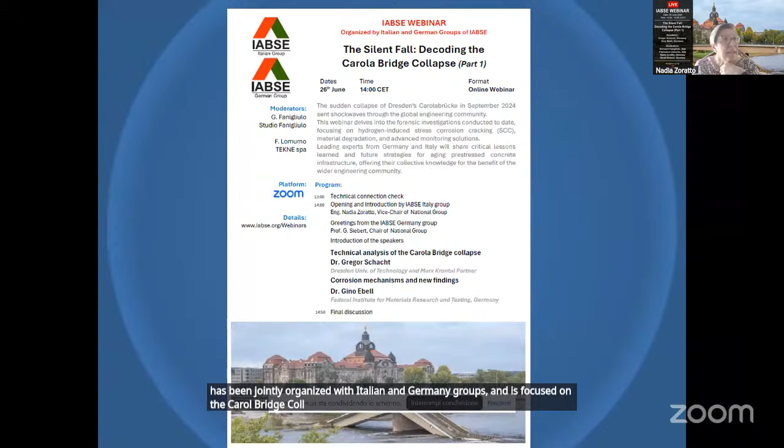Two words to remind you who IABSE is and what it does. IABSE is an engineering association with the mission to exchange knowledge and advance the practice of structural engineering worldwide, looking at all aspects of structural engineering and all types of structures, not only bridges, and also all aspects related to the construction process. I remind you that you can become a member of this great organization as an individual, or alternatively as a collective member. We have members in more than 100 countries.

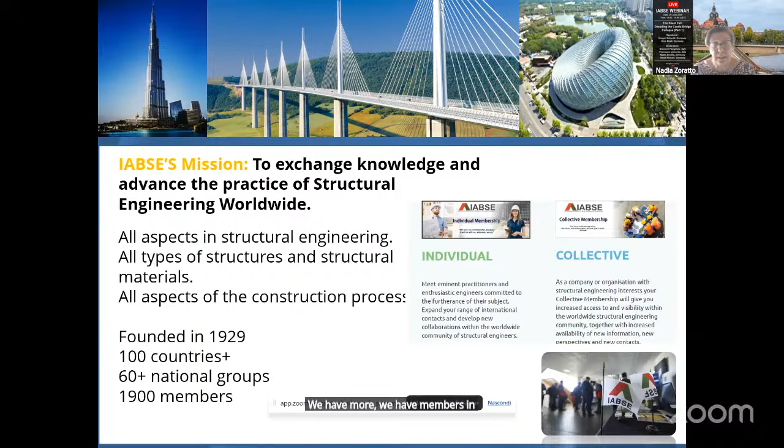For this reason, we have many national groups that are very active in organizing events such as webinars and conferences. In Italy, we have a national group that was refounded recently in 2022, and we are trying to promote several activities with technical task groups and with dissemination and training activities such as webinars and short courses.

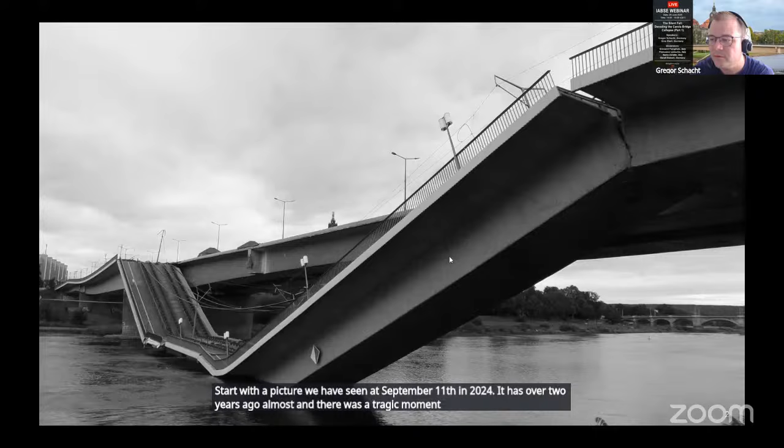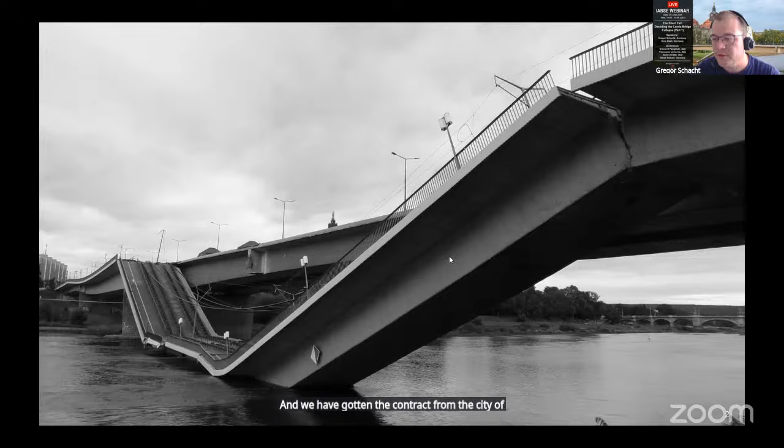Hello everyone. I'm looking forward to presenting to you the findings of the investigations we have done into the collapse of the Carolabrücke in Dresden. I want to start with the picture we have seen on September 11th, 2024 - almost two years ago now. There was a tragic moment when we saw this collapsed bridge laying in the river Elbe. We got the contract from the city of Dresden to investigate the reasons for the collapse, so we were at the site very early in the morning and started the investigations immediately when we could get on the bridge.

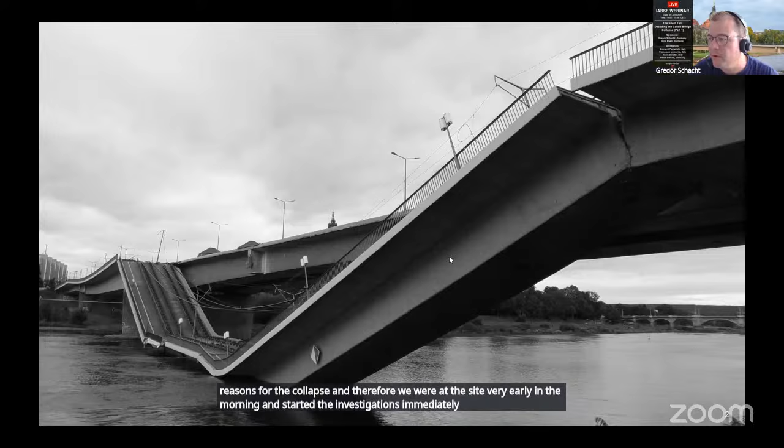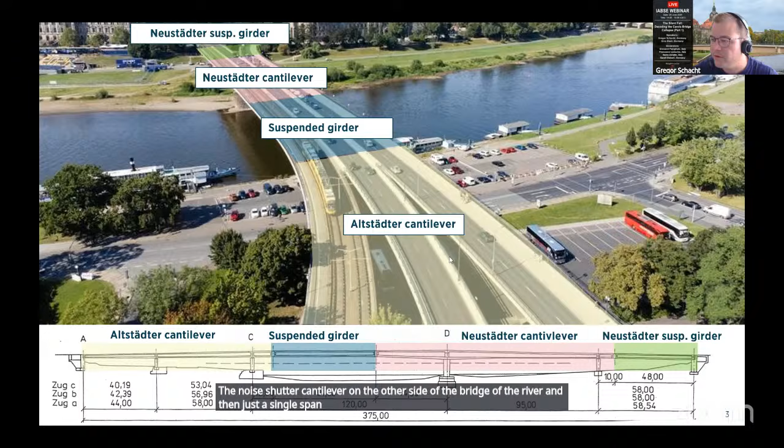First, I want to explain the bridge to you. There are four parts of the bridge: the Altstädter cantilever and the suspended girder in the middle, the Neustädter cantilever on the other side of the river, and then just a single span suspended girder on the Neustädter side of the river. We have a typical cross-section for a prestressed concrete bridge.

What we see in the cross-section at axis D is a lot of prestressing tendons - 194 prestressing tendons. Therefore the compression zone was very compact and strongly reinforced, with a lot of reinforcement there and a thick slab at the bottom.

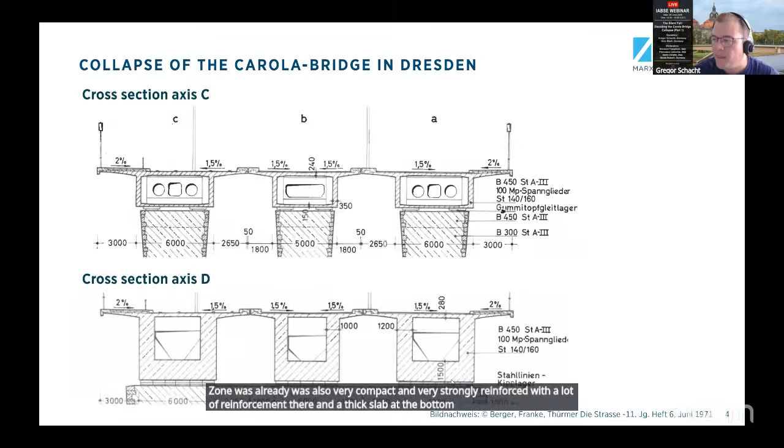The bridge was constructed in different phases. They started constructing the first part on the left side with the cantilever into the river, and on the other side, the second part with the bigger cantilever of 44 meters into the River Elbe, to allow ships to cross during construction. Afterwards, they placed the suspended girder in the middle of the river, and then finished the bridge. Therefore they had to prestress a lot of tendons afterwards, after the self-weight of the girder was active.

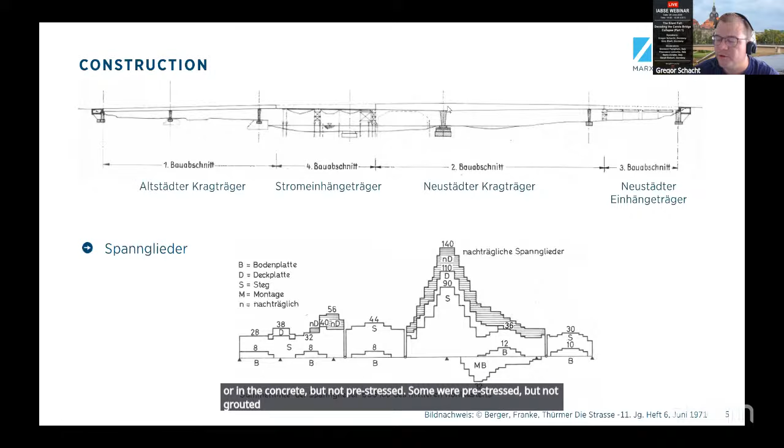These tendons - and that is probably one of the main reasons - many of them were already placed in the tubes or in the concrete, but not prestressed. Some were prestressed but not grouted. So there were a lot of prestressing tendons laying there for a long time during this construction.

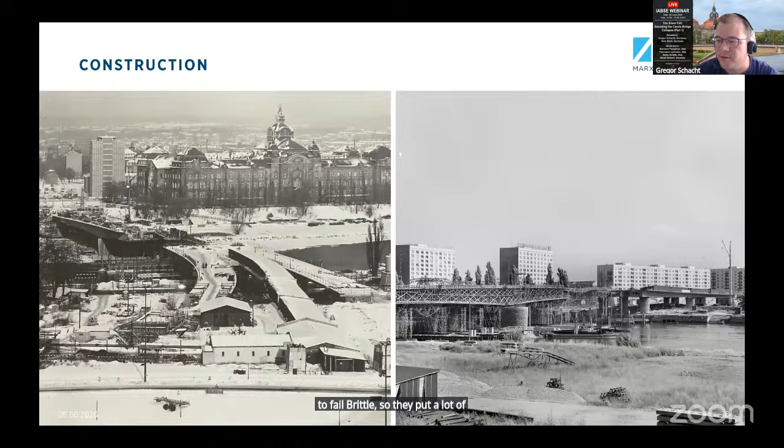They took a lot of care in the construction itself. They placed heated barracks to prepare the tendons before placing them into the cross section, and they were aware of the danger of these prestressing tendons failing brittle, so they put a lot of effort into preventing this from happening. There was one specific construction detail I want to focus on: this cross girder between the superstructures.

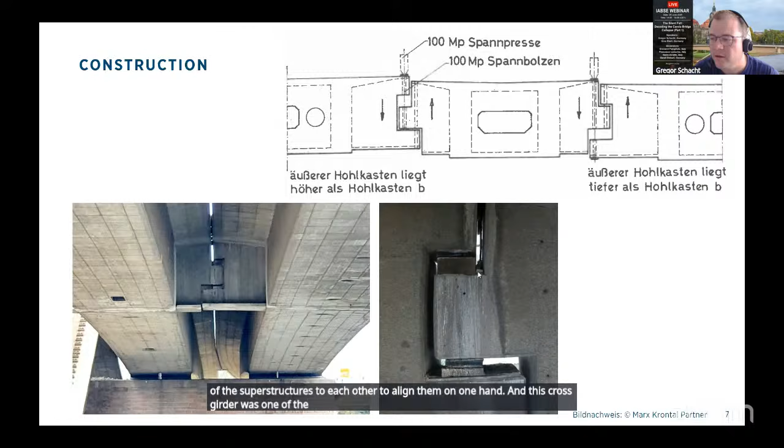They connected the superstructures at the tip of the cantilever, done because they wanted to ensure that all three superstructures had the same height. So they forced them together and arranged the position of the superstructures relative to each other to align them at one height. This cross girder was one of the main reasons why the collapse took place 8 minutes after the last tram crossed the bridge, and not at the moment when the load was actually on the structure.

To have a side view of the collapsed bridge: we have the axis D on the left side, where the breakage started. We have the 44-meter cantilever on one side, the suspended girder, and the other hinge remained on the cantilever of the Altstädter side. At the beginning it was not clear where the breakage started. Here you see the opened cross section, and here is the cross girder I was talking about, placed at the tip of the cantilever - the three superstructures were connected at that point to each other, so they carried and shared the load with each other.

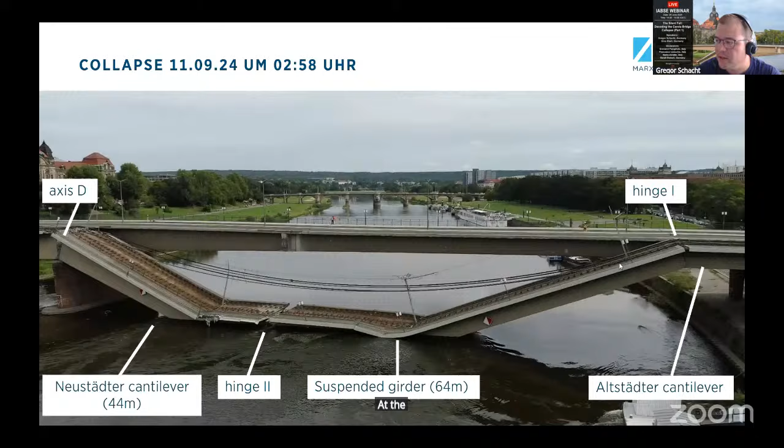At the beginning, as I said, it was unclear where the breakage or collapse started, so we were happy to have a video from ships placed on the River Elbe. They were actually trying to film vandalism, but for us it was a happy coincidence that they filmed the collapse itself.

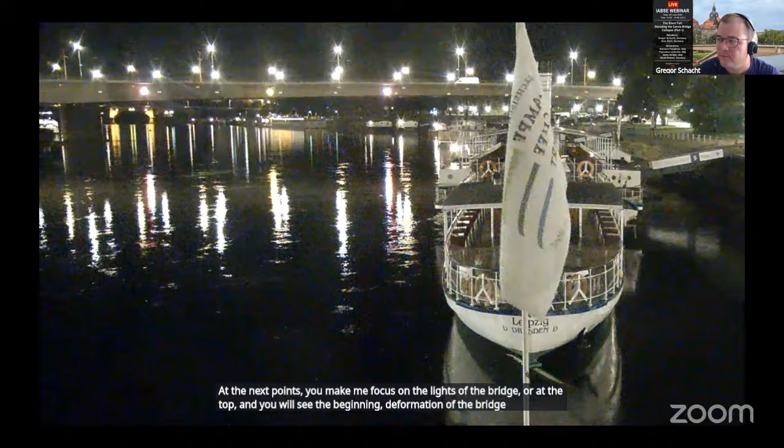If we focus on this white car you see on the bridge on the right side - I hope you can see my mouse - I will click through the single pictures. The car is moving at around 50 kilometers per hour. At the next points, focus on the lights of the bridge at the top, and you will see the beginning deformation of the bridge. Now you can already see the deformation starting. I hope the internet connection is good enough.

As the car goes further, you now see already the bridge is moving downwards, and then it goes really quick.

We were able to see the opening of the cross section at axis D in this video, and therewith we could explain how the collapse started and where the failure started to progress.

Yes, now the self-weight is active and it's only falling into the river. There's now lightning coming up from the electrical power of the tram, and then it was over. Oh, I'm sorry.

Yes, that's the last picture from the ship of the collapse. And in the morning, at the side, it looked like that.

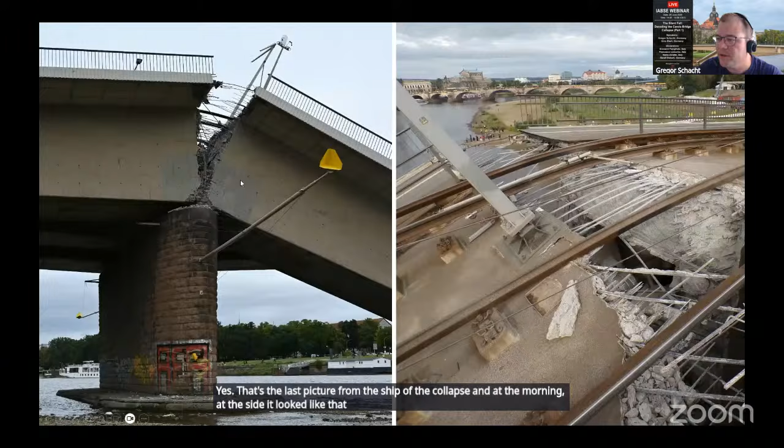We see the cross section at axis D on this side cut, or it looks like it was cut with a knife and opened up. Yeah, only at one cross section.

At the beginning, it was not clear what kind of damage we have here. We see all the tendons placed on this side and the slab at the top here and on the other side. What we can see already is that the broken wires of the broken strands are broken at different points. They look like spaghettis. When we break a spaghetti bundle, it looks like these tendons look like.

Many of the breaking points were inside the tendons in the cross section and some were outside. So that was what we saw on the first day.

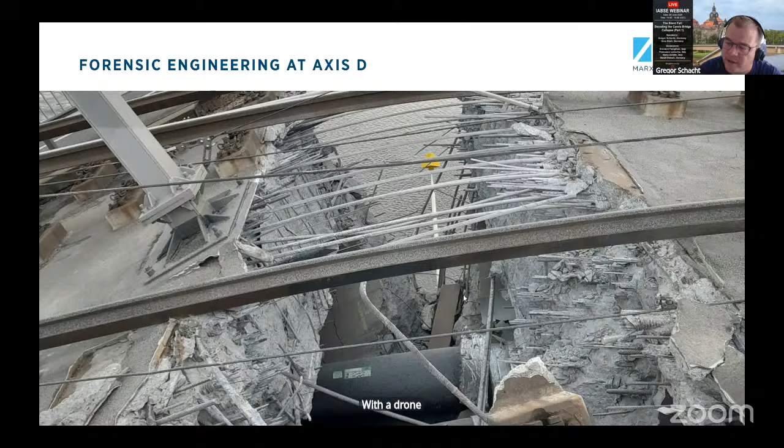And as closer we could get, we started to documentate all tendons with a drone to film all the tendons and to make pictures of them. And then we were getting closer and closer.

What we found was also, maybe one example is this tendon or this wire here, broken at two sides, which is untypical for a prestressed tendon to fail on two sides, on two breaking points.

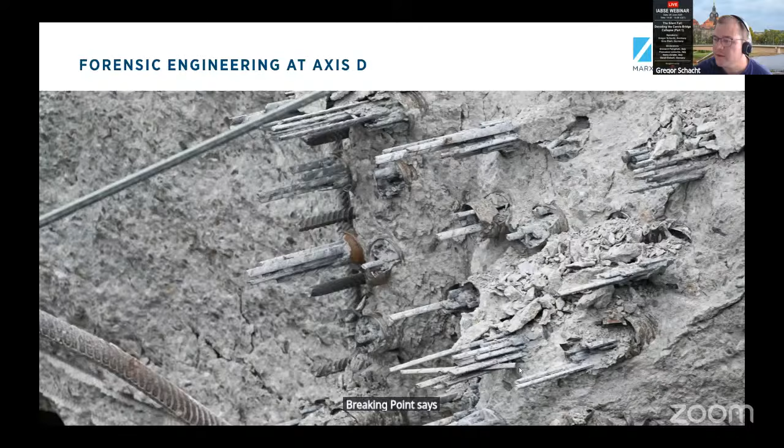Yes, and as closer as we came to the tendons itself, we saw different corrosion states of the tendons. We already had brown tendons or breakage points, cross sections, which were brown and totally corroded.

Gino will explain it later on. We've also found wires that failed ductile, which had typical uncracked, starting cracked, or cracked stress corrosion cracking - these little lenses which form into the steel, which is typical, we can also see it on these tendons up here or these wires up here.

And we had, as I said, different states of corrosion with a lot of brittle failed or brittle broken wires in these tendons. That was pretty clear at the beginning.

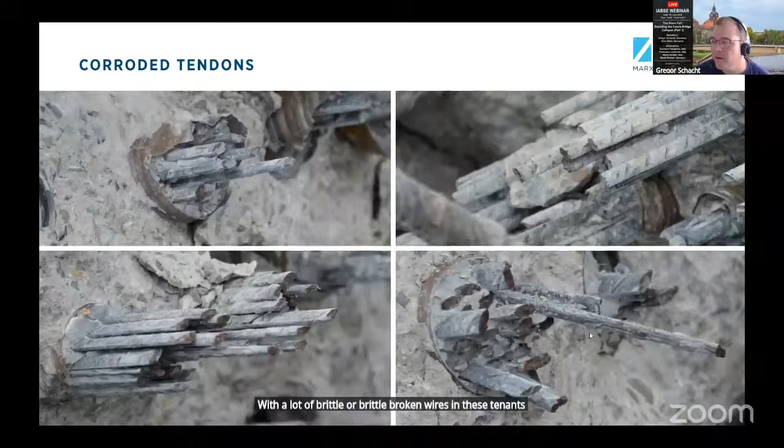After we evaluated the pictures from the camera, we were able to cluster the pictures, we were able to detect different cross sections which were remaining at the time of the failure, and we were able to localize them with the pictures.

As you see, many of the wires in the slab of the Carola bridge have already been broken, and there were not even, or only a few wires left in the tendons which were active at the moment of failure. In these areas we have yellow or green tendons which were sometimes totally working, totally correct, and some were already damaged totally.

So at the beginning, and I just go back to more pictures, at the beginning it was not clear what was the reason for this corrosion, and we had many different suspects.

We had maybe chlorides coming into the isolation of this superstructure, because we have all these tendons broken at the top here at the slab. Maybe this electrical element here was one reason.

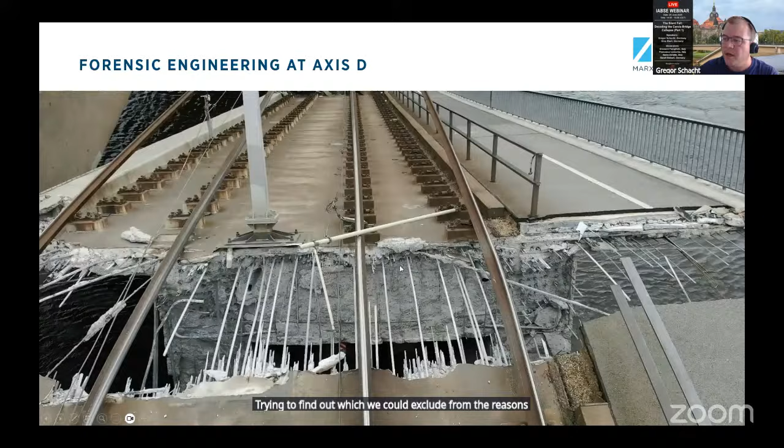So there were a lot of things we were trying to find out which we could exclude from the reasons, and therewith we got closer to the one reason we had for the Carola bridge.

Gino Ebell sent this picture to me around Halloween, and at the first time I saw it, I thought it was an artificial intelligence constructed picture, because the many cracks we have seen on the wires were new for us at that moment - we had never seen wires that had that many cracks already inside.

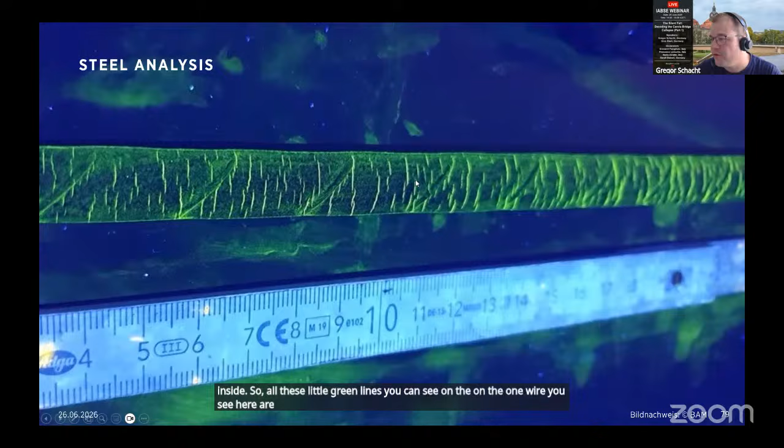So all these little green lines you can see on the one wire you see here are already cracks of the material itself.

We did a lot of tests at the superstructure C, which was falling down. We had to hurry a little bit because, as you can imagine, there were a lot of people there - the police, the fire workers, the army - who wanted to quickly demolish the bridge, and we were there to find out what happened. That was not always easy when the machines are working and demolishing the bridge, and you try to collect as many tendons as you can.

But what we found was also tendons which had mortar, grouting mortar, at the cross section that were broken, and that was therefore proof for us that the wires were already broken at the moment the grouting was done in the past. At the bridge, 29 of 53 samples we took were already cracked.

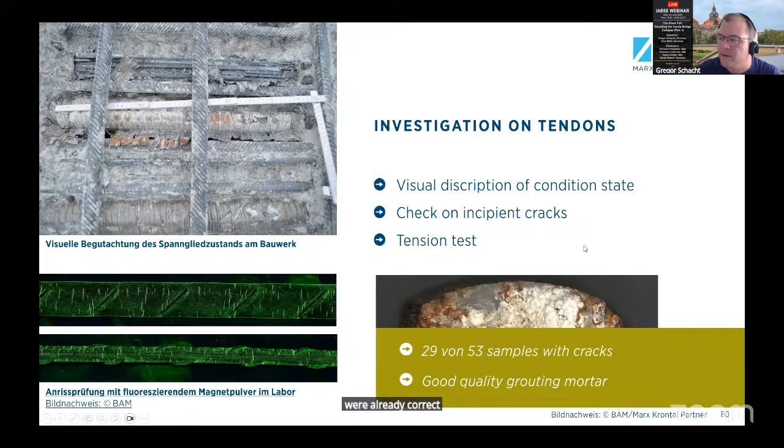We did the same investigations at the other two superstructures, A and B, and at superstructure C only at some spots because the bridge was laying in the river and had to be demolished because of the high water coming up at the time. So we didn't have the chance to test a lot in superstructure C, but we did a lot of testing in the other two superstructures, A and B, and what we found out is that...

Gregor, I think you are having some connection problem.

In the regions of the supports, always at the top of the bridges, at the cross sections of the fields, we didn't find... that was the finding in January, March, maybe March 25, and it's been investigated in Germany, in Saxony, the federal state directly. We had bridges in Böhlen with a lot of pre-stressing wires that were cracked.

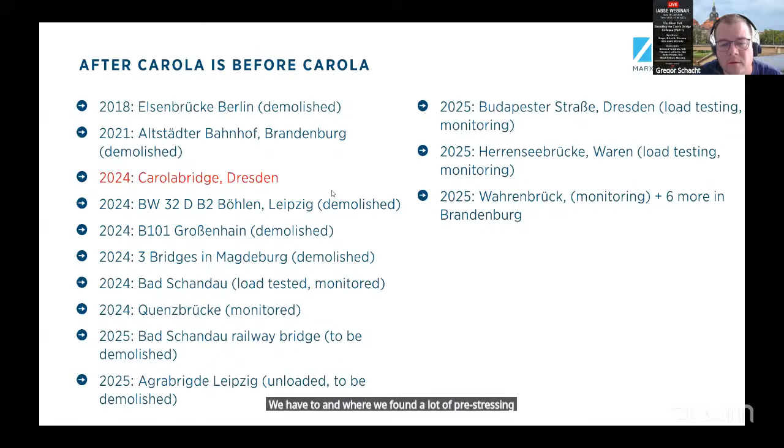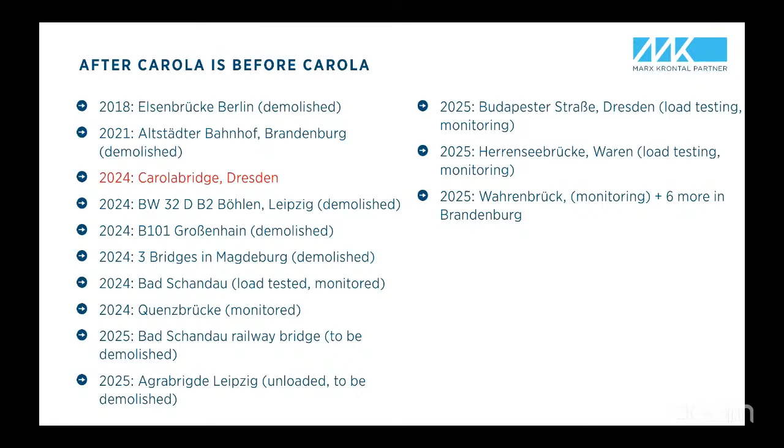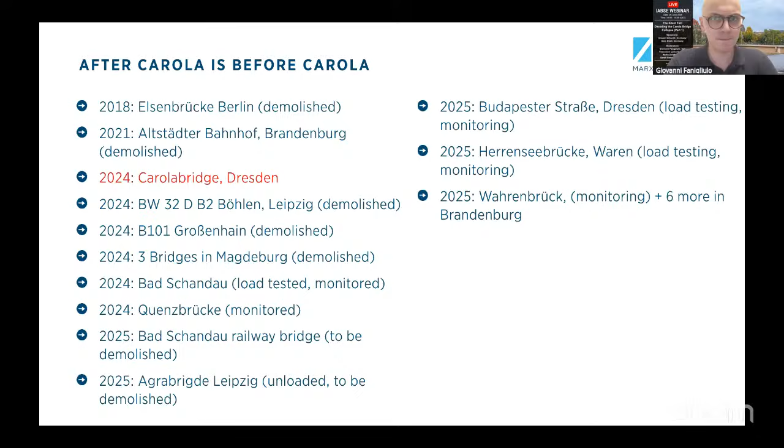Gregor, we don't hear you anymore. Okay, your internet connection is better now? Yes, now it's better. I think we lost the last minute - if you can check your connection and repeat your last minute of presentation. I think your connection is bad, I will now continue. Francesco, can you hear me? Or Giovanni? Yes, now I think it's better. Okay, then I can continue.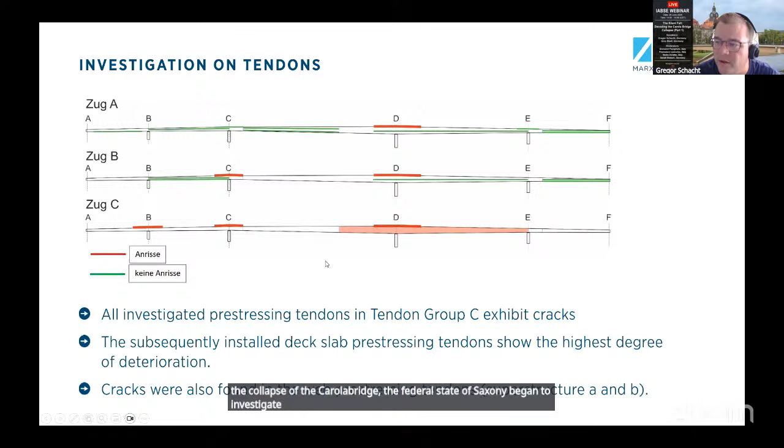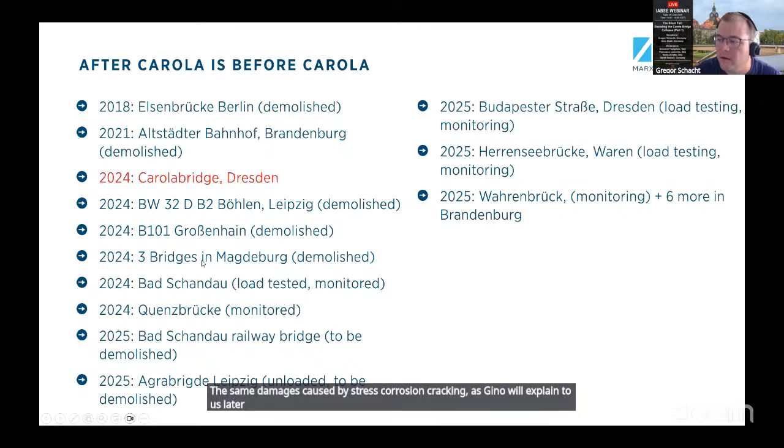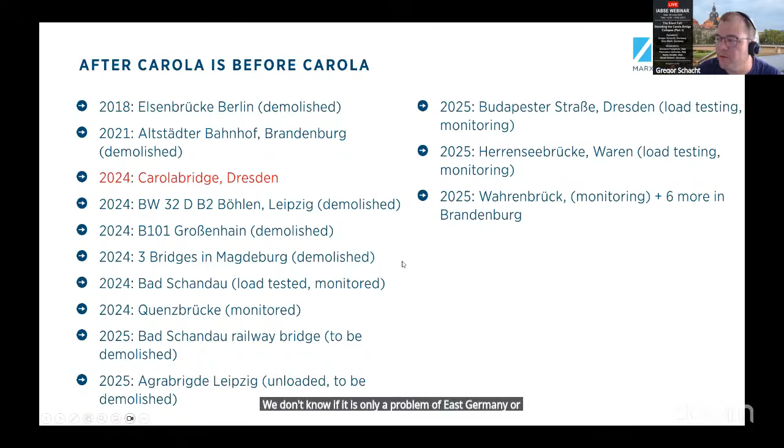So what we concluded was that we found something which was till then unknown - that a lot of wires are cracked above the supports. After the collapse of the Carolabrücke, the federal state of Saxony began to investigate other bridges, and many of them are already demolished, others are monitored or will be renewed with new bridges, and a lot of bridges are closed already in Germany because they have the same damages caused by stress corrosion cracking, as Gino will explain to us later. This is happening right now, and therefore we don't know if it is only a problem of East Germany or for all pre-stressing wires. But Gino will focus on that.

I will skip this, or I just want to quickly go over this phenomenon. The stress corrosion cracking is initiated in the phases of construction till the pre-stressing tendons are grouted, and afterwards the cracking will not continue to grow from the chemical point of view, but will continue to grow through fatigue stresses, which will make the crack grow deeper into the material till the wires break.

So we have a new phenomenon which is showing that cracks are not equally distributed along the longitudinal axis of the bridges, as we have supposed till maybe 2 years ago, and which is the basis for all our analytical evaluations. But we see that cracks are localizing above the supports, and that those are also the points where corrosion is initiated and processes quicker than in the other areas.

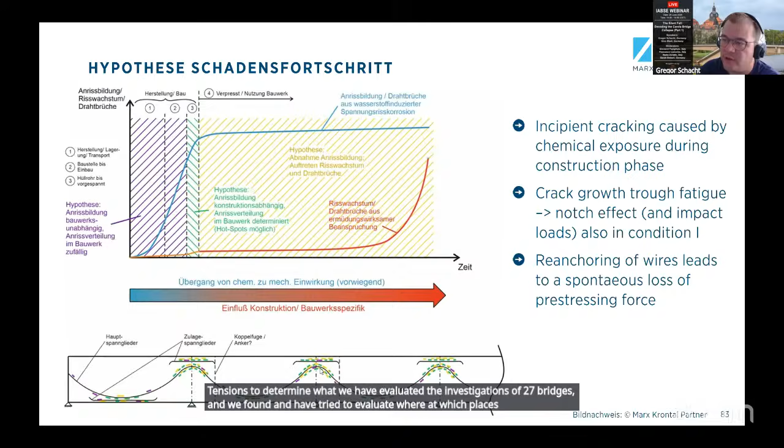So the main finding is that we have to look at the high points of the tendons to determine whether the structure is affected. We have evaluated the investigations of 27 bridges, and we tried to evaluate where, at which places of the bridge or at which areas of the tendon in longitudinal direction, we found stress corrosion cracks and where not. We found that with a probability of 93%, you will find stress corrosion cracks in all these bridges in the top points of the tendons, and only in the low points with a probability of 30%.

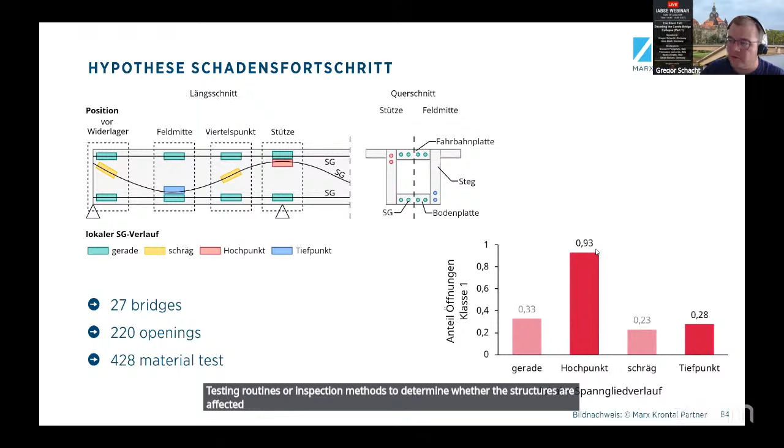So the main point where we have to look at this bridge, or not, is to look into the high points, and that is what we right now have not done in Germany. That's why we will change our testing routines, our inspection methods, to determine whether the structures are affected with stress corrosion cracking or not. Because right now we have always looked at the low points of the tendons and mainly did not find anything. But this is a new thing we found out at the Carola bridge.

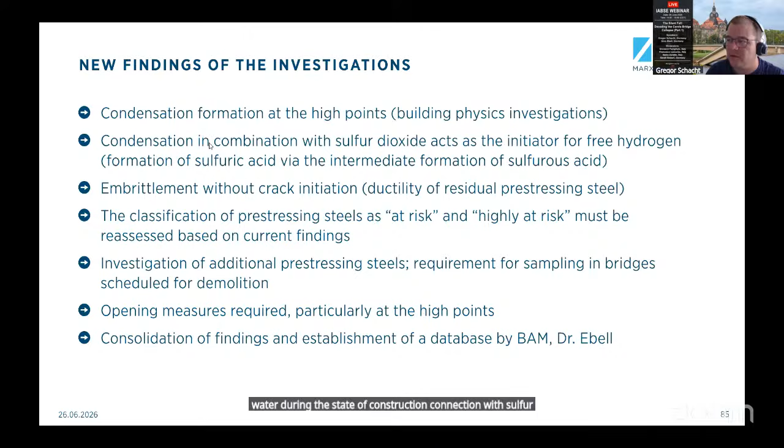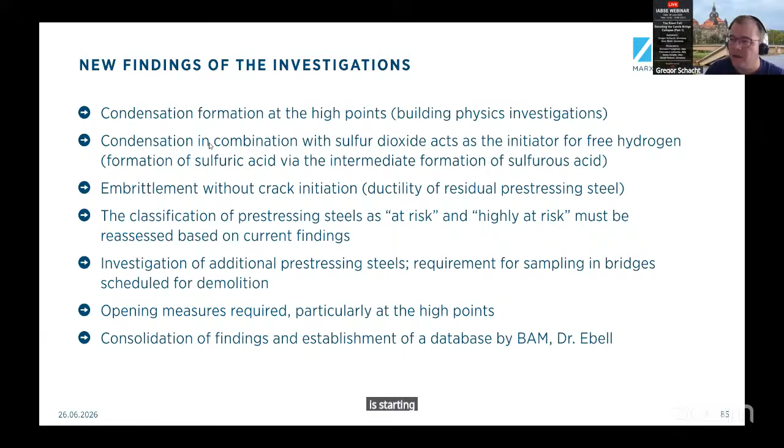I've just put some remarks on the slide here. The main fact is that the condensation of water during the state of construction connects with sulfur dioxide - Gino will explain that in the next presentation - and then the brittle steels crack during or by fatigue in the time during usage of the bridge.

We are not sure whether we have a prior announcement of the failure at the Carola bridge. This proof we are calculating for a prior announcement of failure was satisfied with a high safety level, but it did not show up, and we had only very small cracking in the support region, and these cracks were not seen or detected before the upcoming failure. So we have to look more closely to cracks at these points, especially at the high points of the tendons.

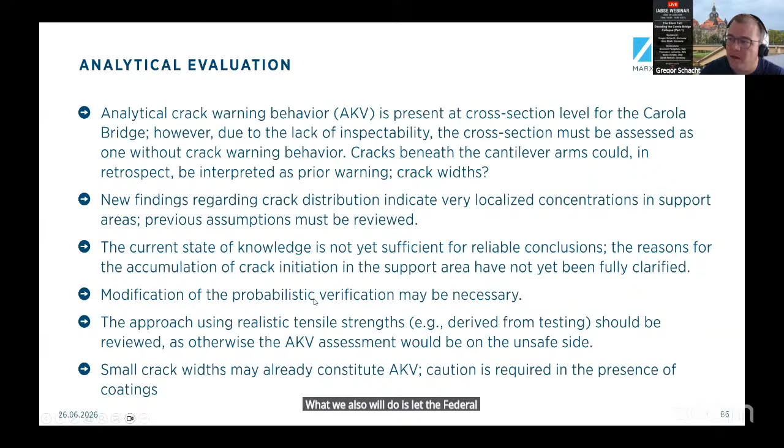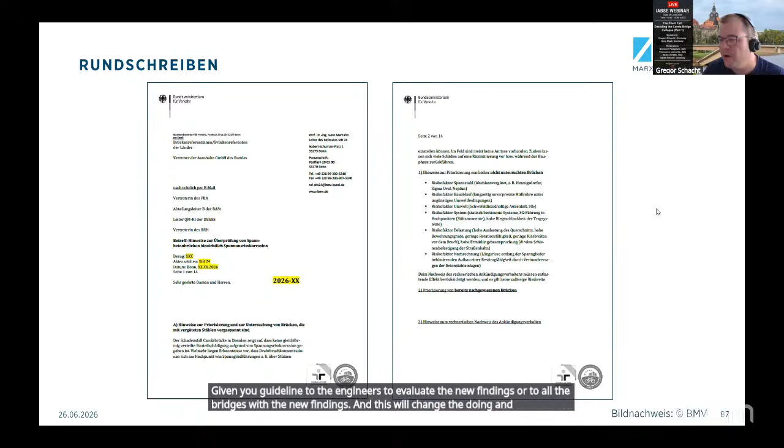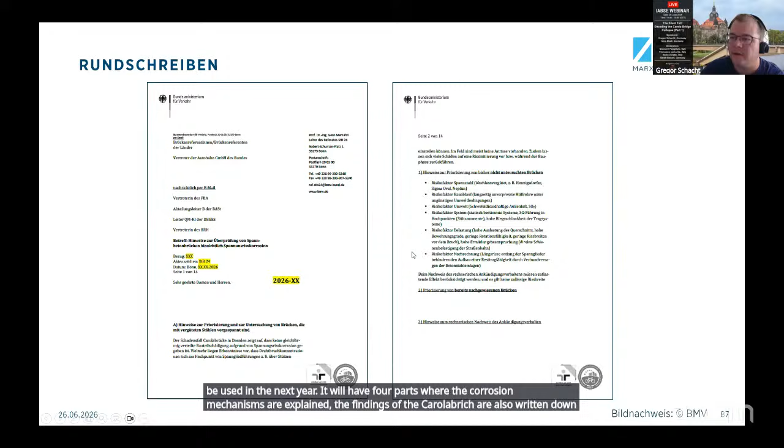What we also will do is that the Federal Department of Transport will give a new guideline to the engineers to evaluate the new findings, or to apply them to all bridges with the new findings, and this will change the practices and rules we have right now. This is in preparation and will be used next year. It will have 4 parts where the corrosion mechanisms are explained. The findings of the Carolabrücke are already written down, and the individual points of what engineers have to do are written down in part A and explained in part B.

There will be a prioritization of the structures which have to be checked again, checked more closely, to find out which structures are more endangered than others. We have to look for structural capacity, especially bridges with high fatigue, bridges with a direct connection of rails to higher impacts, which cause cracking or breaking of the wires.

As I said, longitudinal cracks with a small width. We have new rules for the assessment of these structures, and we will allow a lot of new techniques such as acoustic emission monitoring or fiber optical monitoring to evaluate the condition of structures. We haven't done a lot of research - or rather, a lot of research has been done on this topic, but all the data we collected over the last 20 years was not brought together and analyzed sufficiently.

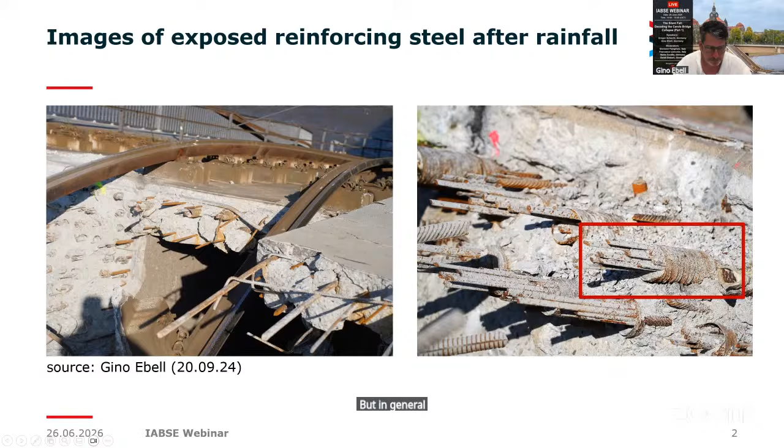But in general, you will see that the broken wires don't have any ductile deformation during the collapse. So it could be a problem of hydrogen embrittlement, meaning brittle broken tendons, and the reason for that could be stress corrosion cracking.

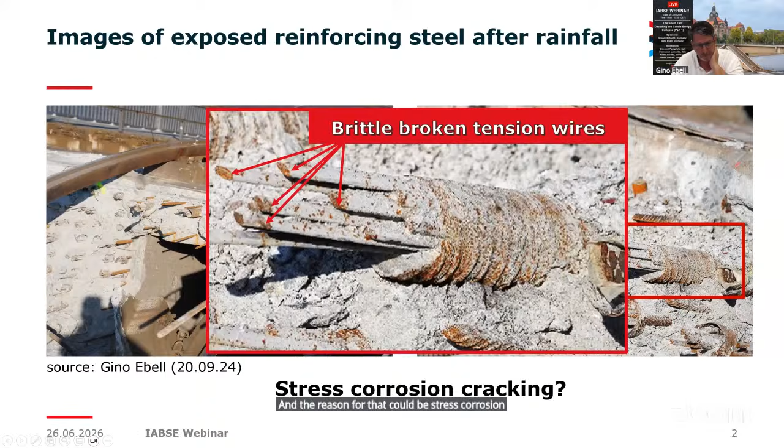In general, we need 3 different ingredients: susceptible material, meaning pre-stressing steel with a high strength class, an electrolyte, and mechanical stress. If those 3 ingredients come together, we get a triangle where hydrogen-induced stress corrosion cracking becomes possible. We already know that the Hennigsdorfer pre-stressing steel is highly susceptible to hydrogen-induced stress corrosion cracking. Mechanical stresses are completely clear - they are always present in pre-stressing structures - but the electrolyte is not clear.

How could it be possible that we have electrochemical reactions directly above the pillar, at the highest point, where no rainwater could reach, nothing else? And as you already saw, the ducts from outside are completely free of corrosion products.

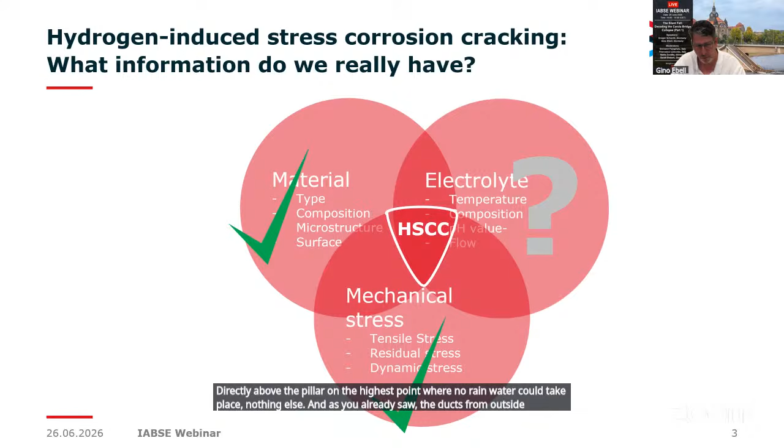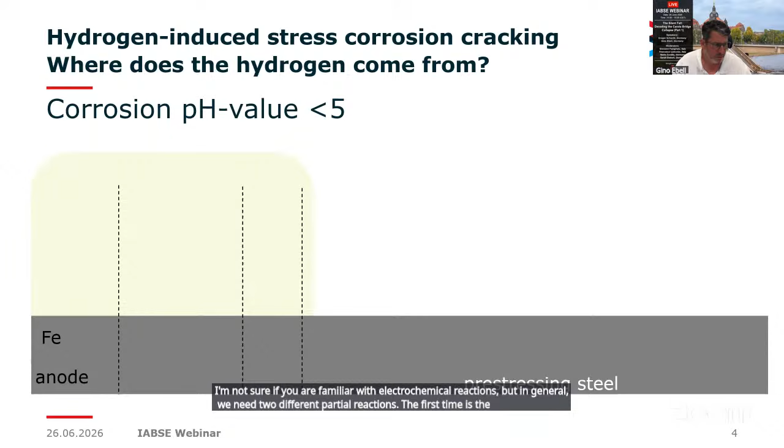I'm not sure if you are familiar with electrochemical reactions, but in general we need two different partial reactions. The first is the anodic reaction, where iron goes into solution and electrons are freed, and it is necessary that those free electrons are consumed by the cathodic partial reaction.

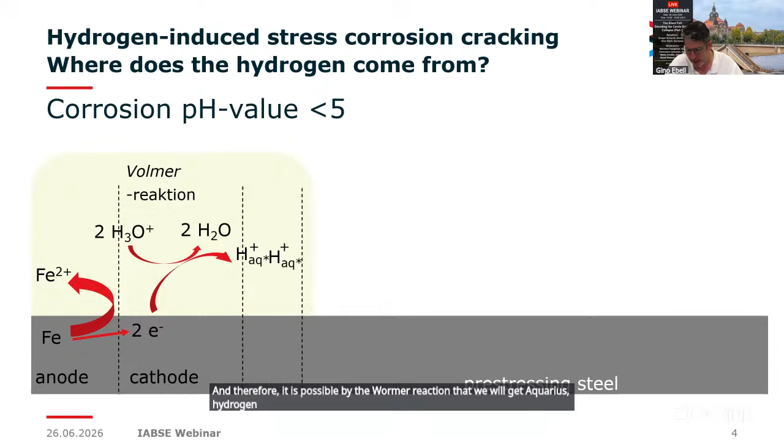Therefore, by the Volmer reaction, it is possible that we will get aqueous hydrogen inside the electrolyte. These hydrogen atoms could be absorbed at the surface of the steel and driven by high equivalent hydrogen pressure into the steel. As you can see here, it is necessary that we have a pH value lower than 5. Otherwise, the cathodic partial reaction proceeds by reduction of oxygen and no hydrogen will be produced.

So right now you will already have a question: how could it be possible that we will have a pH value lower than 5 in concrete structures? At the end of the building or construction phase itself, it is impossible, because the mortar which fills the ducts is always highly alkaline, with pH values higher than 12, or up to 13.5.

These both reactions are therefore not so relevant for us. This is also a picture which Gregor already showed, the cross-section of the girder right above the pillar at point D, and we will have a detailed look at these embedded tendons here.

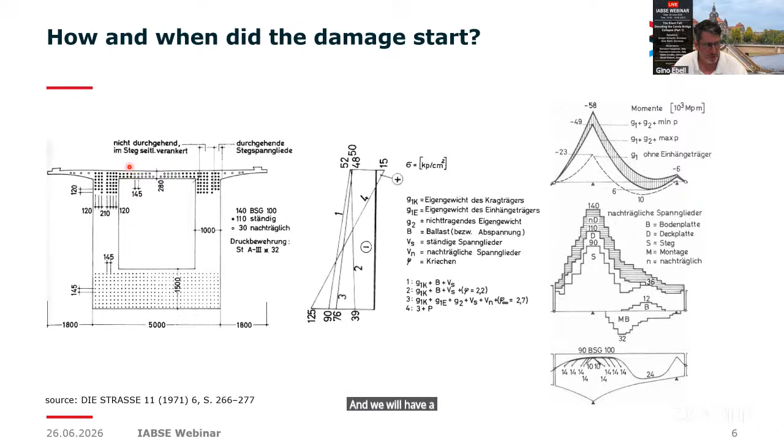The anchors are located inside the box girder, so they are protected against rainwater. It is impossible for rainwater to flow into those ducts. That's fine.

Until they could completely pre-stress the embedded pre-stressing wires, the end of the anchors is completely open. There are holes inside to press in the mortar and also to let out the air inside the duct during the filling of the ducts themselves.

But we will have a problem due to those big concrete structures, due to the hydration heat of the hardening process of the concrete themselves. So the temperature inside those box girders, if you have winter time outside, it takes several weeks up to months until it is cold in here inside.

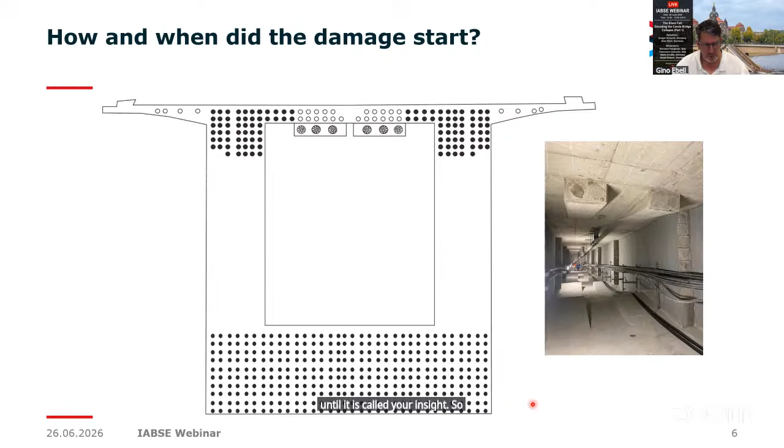So it could be possible that we will have a temperature shift from inside to outside. Inside the structure, maybe it could be 15 degrees plus, with high humidity inside. That's also clear inside a concrete structure without any formwork inside.

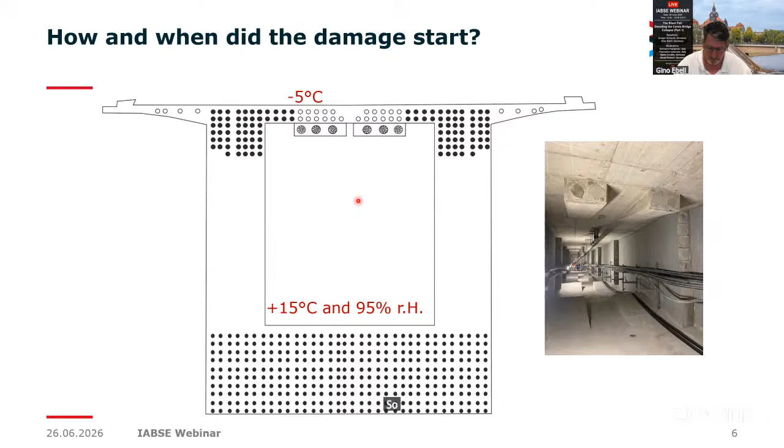So humidity could diffuse into the box girder. And at the outside, during winter time, you already saw the picture from the building process in winter with snow on top - it could be possible that we have minus 5 degrees. So right now we will have a problem inside the non-filled ducts.

Due to the dew point undershoot, which is only 0.8 degrees, it could be possible that we will get condensation water inside the ducts, forming drops on the inner side, but at the top of the duct - I call it the 12 o'clock position - at the upper side of the ducts.

And now we will have a moisture content inside the ducts, which could also form moisture films on top of the embedded, non-protected pre-stressing steels. But then we need to ask several questions.

Could condensation water alone cause such significant hydrogen loading or evolution? Is the pH value low enough to ensure a cathodic partial reaction with hydrogen evolution? That means the pH value of the moisture film needs to be lower than 5. Could there be other environmental influences, maybe air pollution, that interact with the condensation and drastically increase the corrosiveness of the electrolyte?

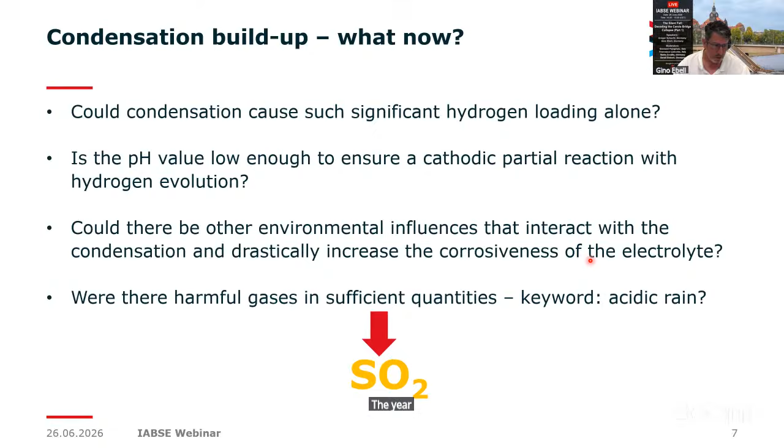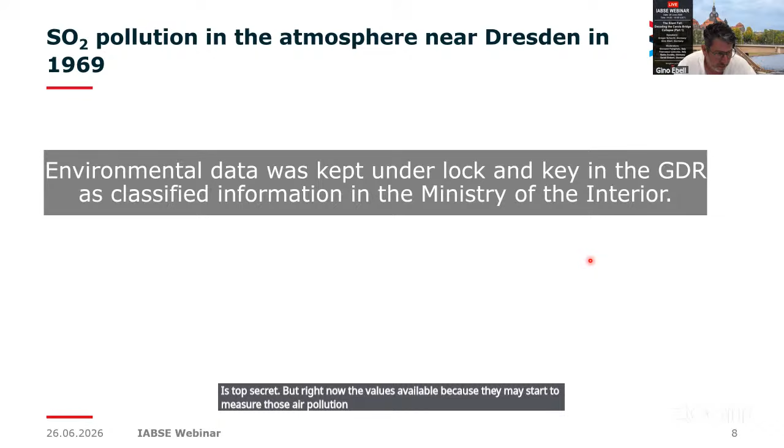Regarding harmful gases or air pollution: at the date construction started, in the late 1960s, we had high sulfur dioxide content in the air. In general, in the former German Democratic Republic, environmental data was kept under lock - it was top secret. But now the values are available, because they started to measure those air pollution values since the mid-1960s.

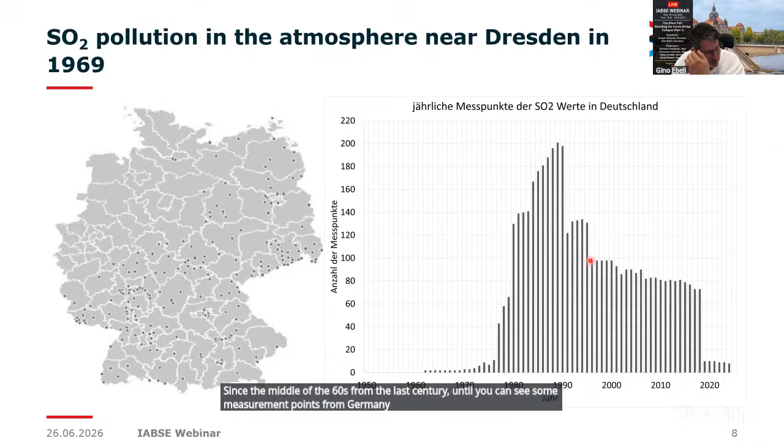And here you can see some measurement points from Germany we already investigated, and these are the values from 1969.

And here you can see during the heating period, everybody used coal to produce heat inside their flats, and they also used it to produce electricity without any sulfur filters inside the power plants. That means we have the highest values, up to 1,050 micrograms per cubic meter, of sulfur dioxide in the air.

Comparing for you right now, current measurements at a highway during the winter time, we have 1.04 micrograms of sulfur dioxide in the air. So there is a gap of more or less 3 decades.

But we are able to produce artificial environmental conditions in a special chamber. It's called a Kesternich chamber, and there we filled in 500 micrograms per cubic meter of sulfur dioxide.

With this artificial situation, we also used artificial rainwater, and comparing the sulfur dioxide inside, we formed an electrolyte film with a pH value of 3.55 after 24 hours of exposure. That means in a time span of 24 hours, we can shift the pH value, just due to the sulfur dioxide content in the air, from 5.8 to 3.55.

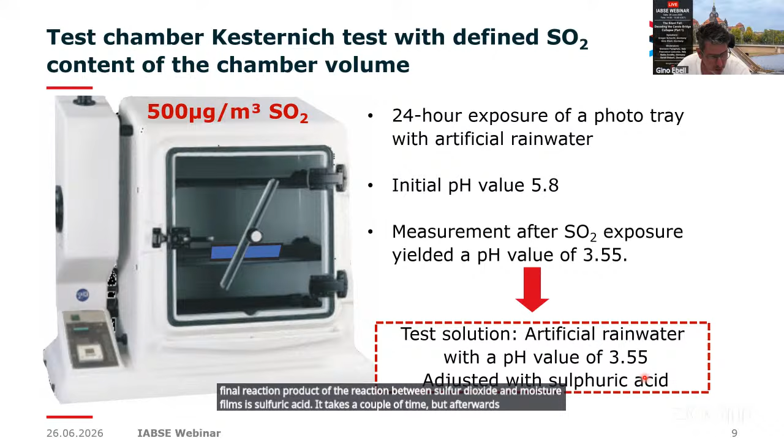Here we can fill in the artificial moisture film we produced in the chamber, or the artificial one we produced afterwards with the sulfuric acid. And at the other side, we can directly reduce the protons by electrochemical measurements, and directly get an idea about the volume of hydrogen which could diffuse through the iron foil.

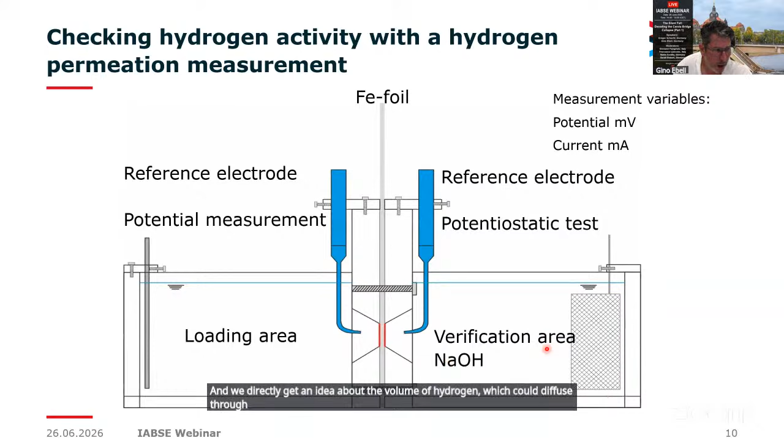So now I will show you the first result where we used the artificial rainwater added with sulfuric acid. The red line is the electrochemical potential at this stage, and at this pH value, minus 600 millivolts is a clear indication of a corroding metallic, or iron, surface inside this solution. On the other hand, you will see the hydrogen transient during the measurement time, and it's about 0.

This is a result in case of science which we don't want to see, but this is a kind of investigation, and this could always happen if you have a great idea and it doesn't really fit. But the main reason why we don't have high hydrogen evolution must be directly affected by the sulfur dioxide. So we thought about it, and between the exposure of moisture films to sulfur dioxide and the formation of sulfuric acid, there's a step in between: the formation of sulfurous acid. That's something different, because we have a change in the anion.

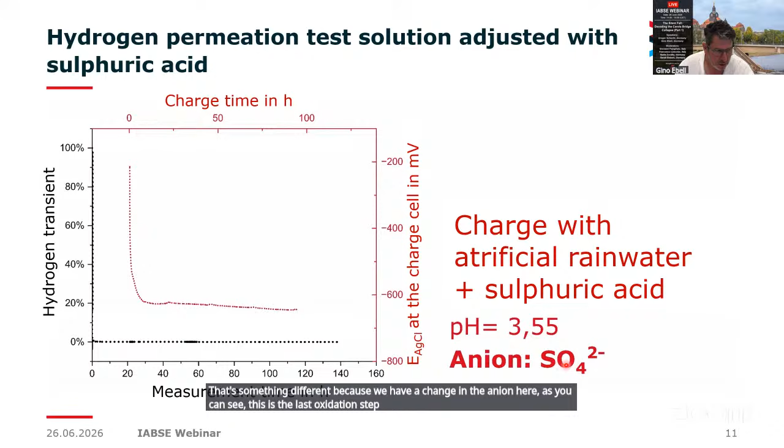As you can see, this is the last oxidation step of sulfur, and there's something in between: the step before is SO3 2-. There's only one way to produce it directly in the chamber; there's no chance to produce it in an artificial way, because sulfurous acid is thermodynamically not stable. It directly oxidizes to sulfuric acid, but the oxidation step itself produces hydrogen at the steel surface.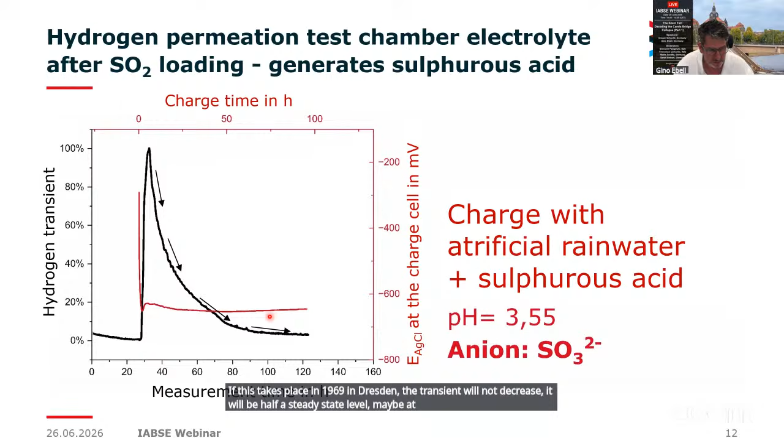So that means we need to have a look at construction sites where it is possible that we will get moisture films inside the ducts during the construction process, and where we will have high sulfur dioxide contents in the air.

But afterwards, Gregor already showed it. What does a pre-stressing steel's surface look like? This is a surface which you will see when you replace those kinds of pre-stressing steel from the bridge structure, and you can't see any crack. You can't see any pits or holes due to corrosion processes, because the oxidation process from sulfurous to sulfuric acid is not a corrosion process. It's just an oxidation step, and this oxidation step forms hydrogen by themselves without any corrosion visible on top of the mill scale of those kinds of steels.

But the same steel, due to the MT measurement, meaning magnetic powder measurement with fluorescence view, looks like that. There are several cracks inside, but it's impossible to see just by normal optical view.

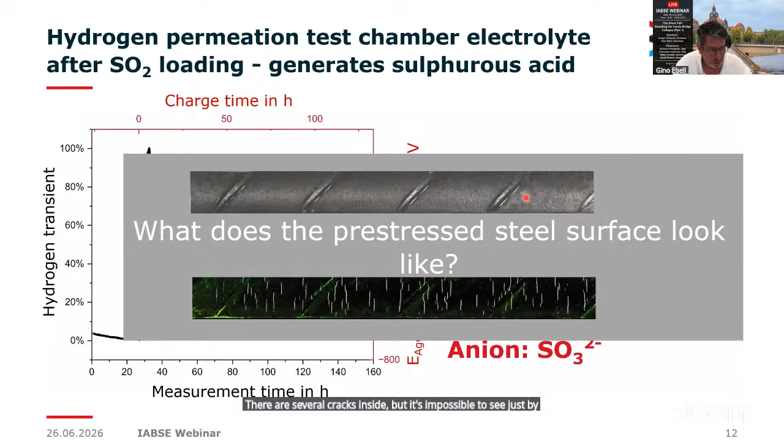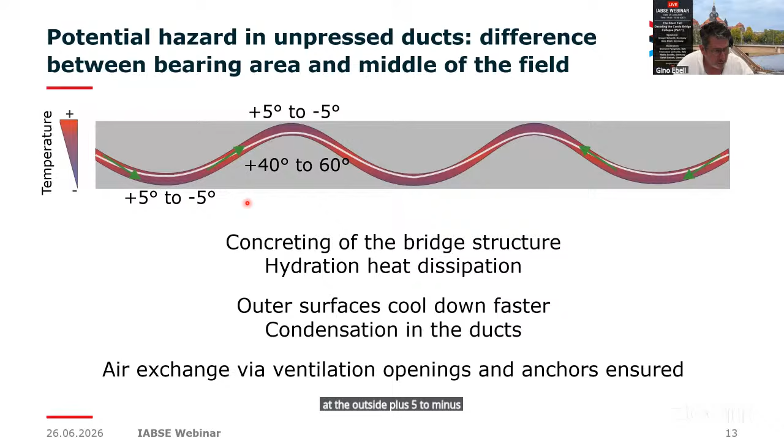Yeah, how could this be possible? When we have a detailed look into our ducts at the inner side, due to the hydration process, we could have plus 40 to 60 degrees at the fresh concrete state, while at the outside, plus 5 to minus 5 could be possible. And then we will get condensation water inside of the field between the pillars. It doesn't play such a big role because the moisture film is at the bottom of the duct and the pre-stressing steels in this range are on top. That's the reason why we couldn't find so many cracks in the middle of the structures.

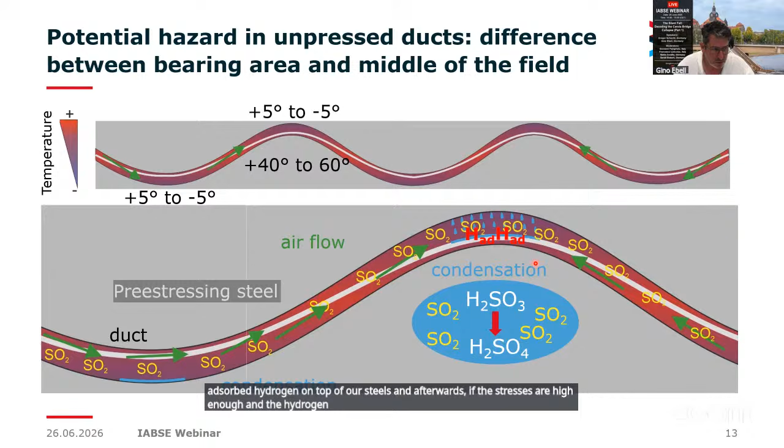Directly above the pillar, it's completely different. The moisture film is formed on top, drops will form if the content is high enough, and those drops will fall down to the embedded pre-stressing steels. And afterwards, we will have the oxidation reaction from sulfurous to sulfuric acid, and this forms adsorbed hydrogen on top of our steels. And afterwards, if the stresses are high enough and the hydrogen amount is high enough, we will get cracks inside our high susceptible steels.

We are also able to get an idea when we open those ducts for bridge inspections. It's also a picture Gregor showed you. We will have so-called corrosion products inside at the 12 o'clock position of the duct. From the outer side, you will see not a single corrosion product. If you open the duct and you have a look at the top here, you will see corrosion products. And if you see them, then it could be possible that you have exactly this reaction inside during the building process, and it could also be possible that you will have cracks inside the steel.

So right now we definitely know the material is highly susceptible, in this case of the Carolabrücke it's Hennigsdorfer pre-stressing steel. Mechanical stresses are always given. And we have an idea about the electrolyte which was necessary for those drastically hydrogen evolution inside of the non-fulfilled ducts.

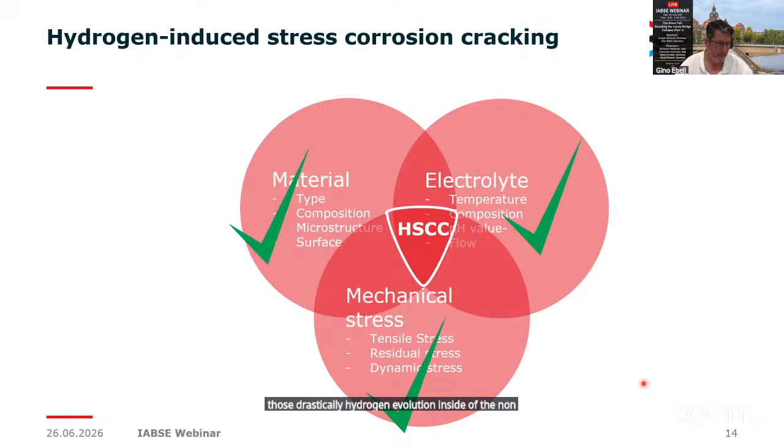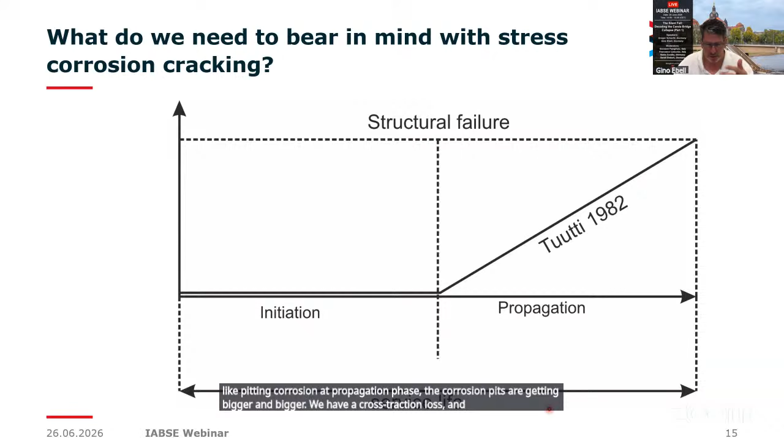Yeah, and there's something special. It's more or less a similar view like Gregor already showed. There's a so-called Tuutti diagram. Normally, in case of a structure failure or during the service life, we have the initiation phase, maybe due to carbonation or chloride ingress, and we will initiate a failure here, like pitting corrosion. The propagation phase, the corrosion pits are getting bigger and bigger. We have a cross-section loss, and several years later, the structure could collapse.

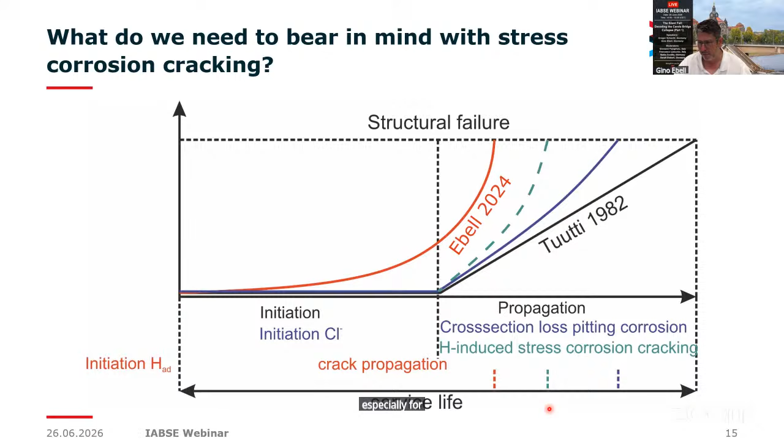In case of chloride ingress, it could be a bit faster. In case of the normal kind of view, hydrogen-induced stress corrosion cracking could also accelerate the process. But the reality right now is something else. We never had an initiation phase. The construction starts to run under traffic with drastically damages at the pre-stressing steels, because the cracks are always inside the steel before they are fulfilled with mortar. And this is a completely different kind of view, especially for the problem of cracked wires regarding fatigue.

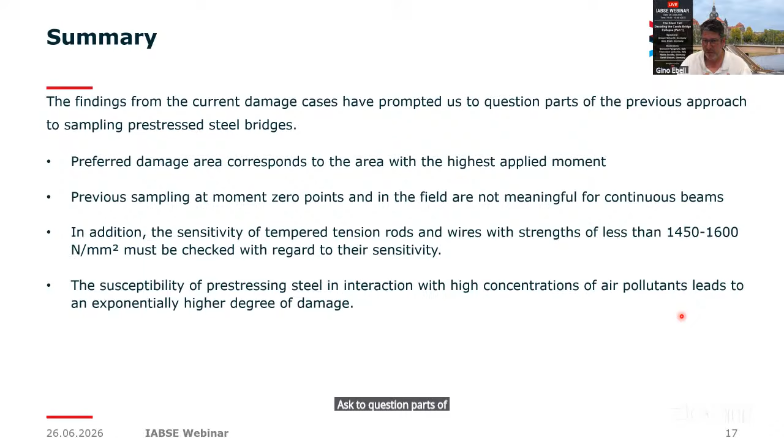Preferred damage area corresponds to the area with the highest applied moment. So it's directly above the pillar, it's clear. Previous sampling at moment-zero points is completely out of scope. You can't find any cracks in those areas.

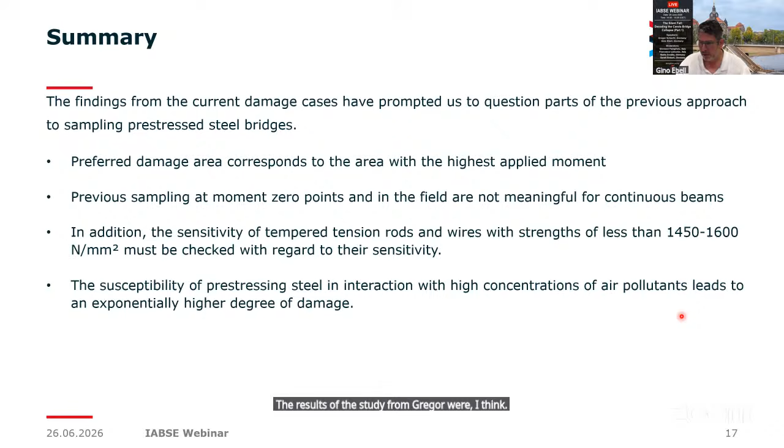Under critical conditions, also if a high amount of sulfur dioxide is in the air. And also in the field, you saw the results of the study from Gregor, where I think 93% of cracks would be found directly above the pillar, at the highest point of the ducts.

In addition, the sensitivity of tempered tension — meaning quench and tempered tension rods and wires — with strength classes lower than 1,450 to 1,600 Newton per millimeter square must be checked.

We already investigated the first ones with a lower strength class, and they are also highly susceptible. That means the amount of bridges we have to check currently increased drastically.

The susceptibility of pre-stressing steels in interaction with high concentrations of air pollution leads to an exponentially higher degree of damage. That's the reason why we saw so many single cracks at one wire, or multiple broken wires, with a span of less than 10 centimeters between two complete cracks of the cross section.

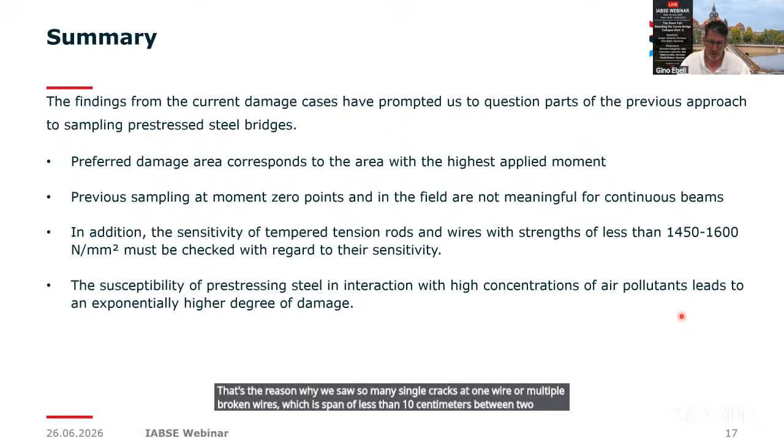Thank you for your kind attention.

Thank you, Dr. Ebell. We will now go directly to the Q&A session. We've got one question from the public, and I believe it is directed towards Dr. Schacht: According to your opinion, what were the displacement mechanisms of the Carola bridge before the collapse?

It can be assumed that there was certainly an increase in vertical deflection, but do you think that sector D, the tram section, could also have experienced horizontal displacement towards the east prior to the collapse? And if so, could this be related to the asymmetric loss of pre-stress? Finally, do you think some parts of sector D may have moved upward before the collapse?

Okay, I'll start with the first question. Vertical displacements might have been there, but they must have been very small. We didn't do a check two days before the collapse, so we never know how many cracks were really visible some days before. But the tram passed over the bridge, the bridge stood clearly, and it took 8 minutes to fall down because of the cross girder I mentioned.

You can see it in the back, at the tip of the cantilever — there was this cross section, and the superstructure laid on this cross girder. Only in the moment the last tendons or last wires broke at support axis D did the full weight of the cantilever arm lay on this cross girder, and then it fell down. So I don't know if there was much vertical displacement prior to the collapse, actually.